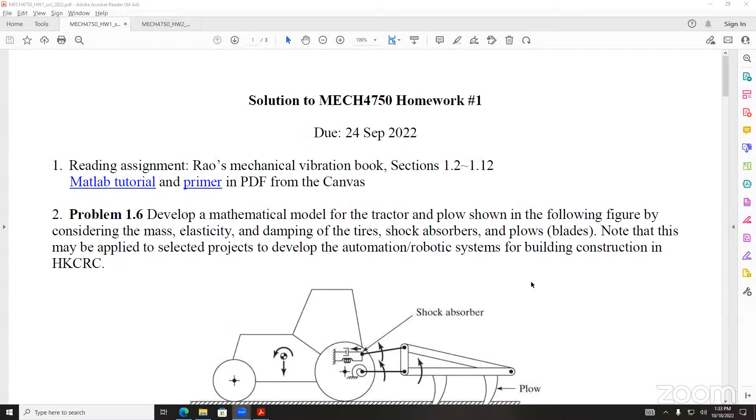I still want to remind you that we really want you to spend time to study and understand this concept of vibration engineering, so that we can tell, either the TA or me, if you spent time to do the homework by yourself.

If you really try to copy your classmates or the TA or something, I will look at your homework again and do some proper deduction of your score. I need to give you all a warning.

If you don't do the homework by yourself, I will try to double check your homework again. If there's clear evidence that you copied your classmates' homework, I will give you a 0 mark in the grading. The TA has already seen it, but it's clear.

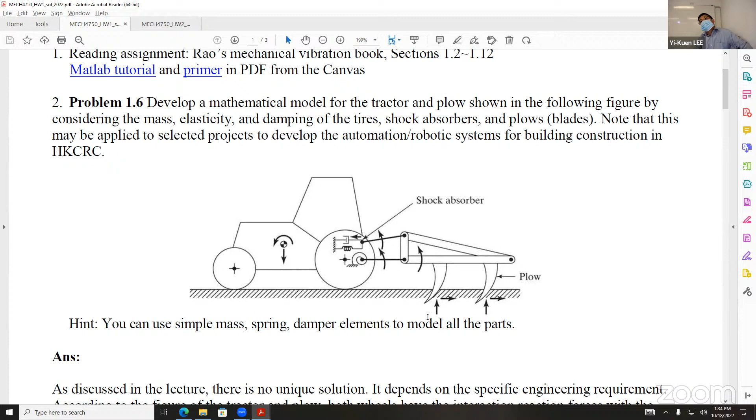Some of you, if you don't follow our UST policy, I will try to make additional deductions. So that's something I need to let you know. When you submit it, I do want you to spend time doing the homework by yourself. I have to let you all know, okay?

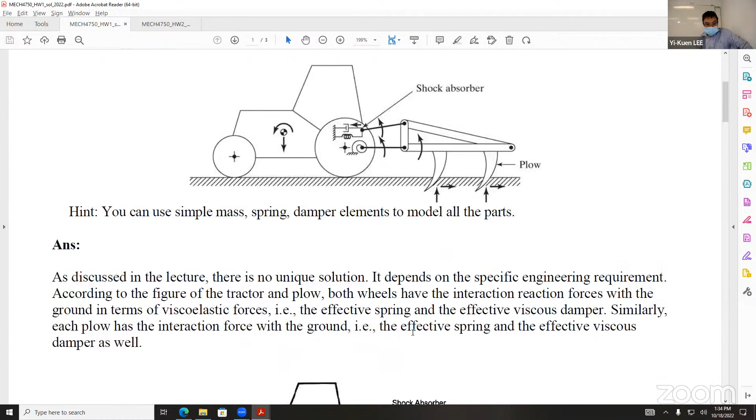For the first one, it's simple, but I also remind you that if you just simply show this result without a simple explanation of why you get this, you need to be careful. That's why you try to propose this kind of model for this chapter. If you simply show this figure without any explanation, I will follow up.

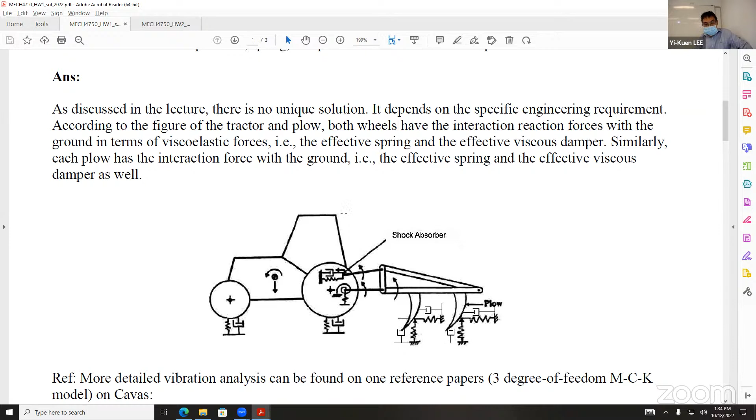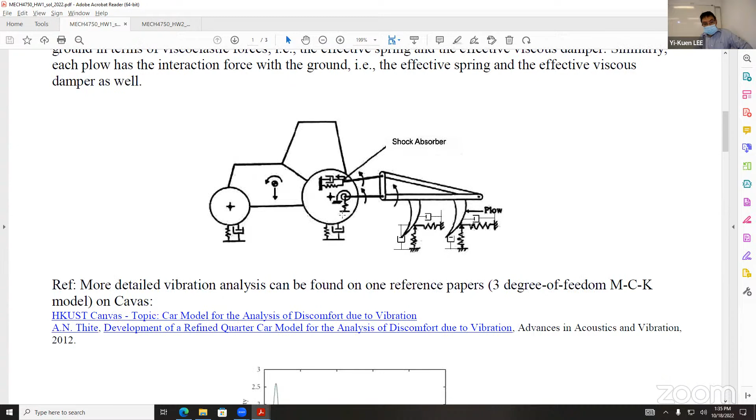The TA will give the preliminary grading, but I have provided you additional reference on our Canvas website, so that if you don't really try to explain, I'll just tell you why.

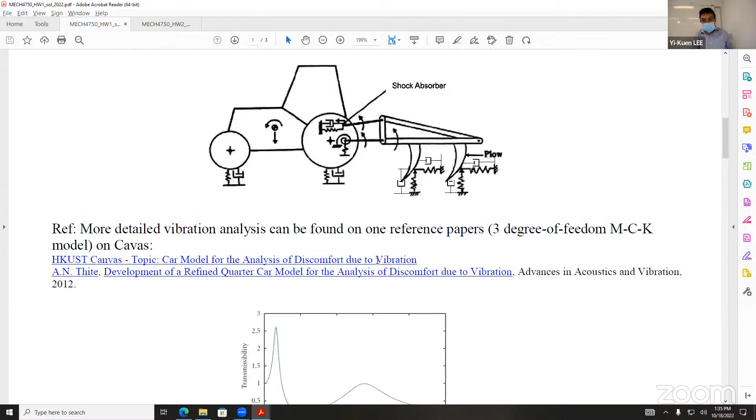For this particular problem, I already mentioned in a previous lecture, and on Canvas, additional information, so try to understand about this kind of real frequency response function, or vibration response, of this car model.

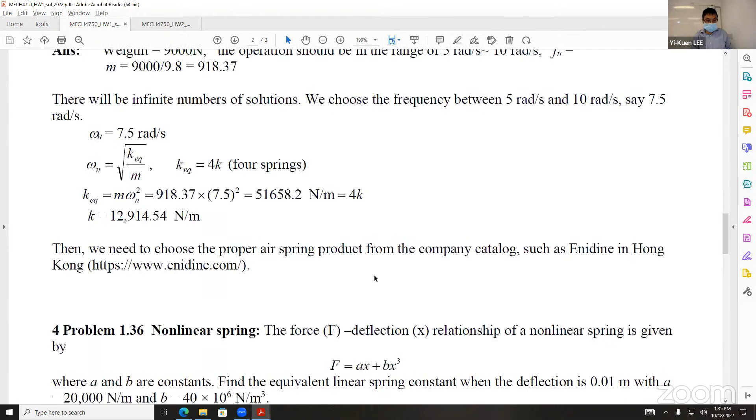This one I think is not challenging, but I also let you know that the problem I ask you to do is related to some real vibration engineering in field study, so it's important for all of you to have some understanding about real vibration engineering.

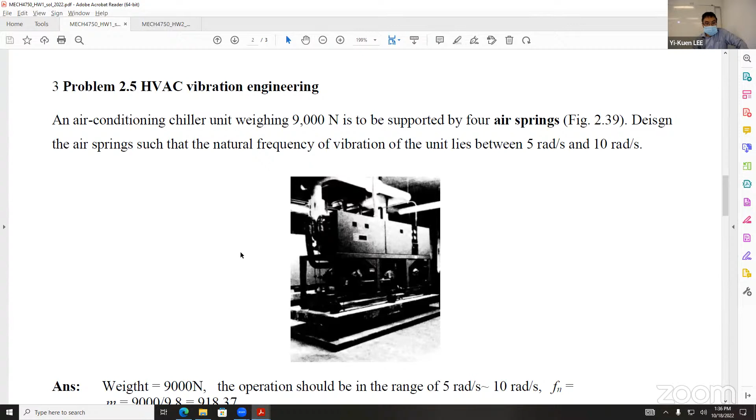That's something I emphasized many times right in the beginning, so I don't want you to simply do the homework without understanding the engineering aspect of this kind of work.

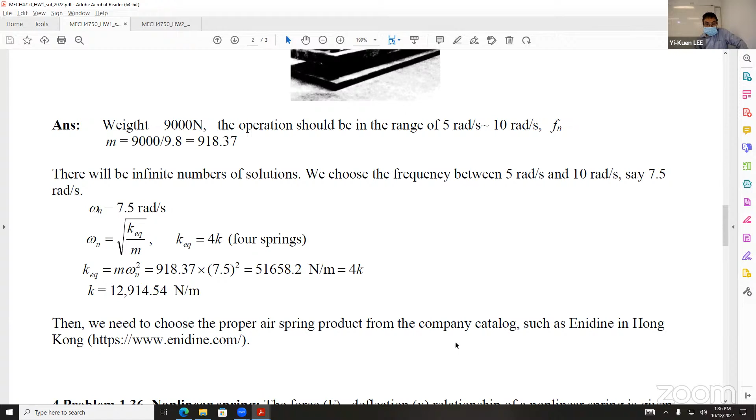That's why I also provide you this, so when you do the homework, if it relates to real vibration engineering, for example, this company has this kind of product for local engineers to use in vibration engineering, so I tell you.

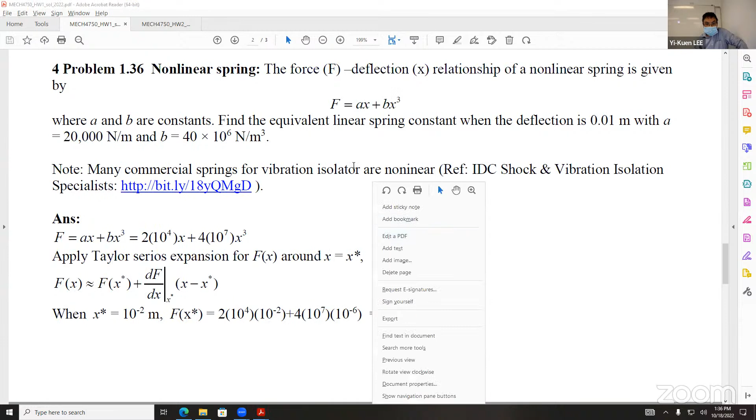Number 4 is another thing I mentioned - this is not just basic homework, but in reality, many passive vibration control systems involve this kind of nonlinear component. You have M, C, K, and most likely sometimes your vibration isolator and vibration damper are somehow nonlinear.

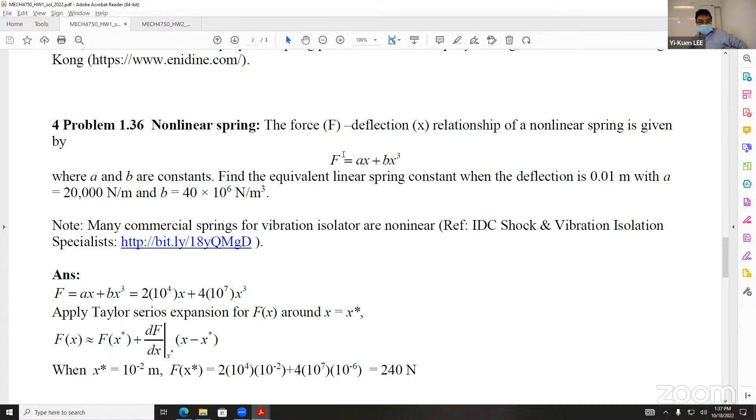Here it's just to show you, and I mentioned several products that are most likely nonlinear, so this gives you some real understanding about how engineers can use simplified, linearized models to work on vibration engineering.

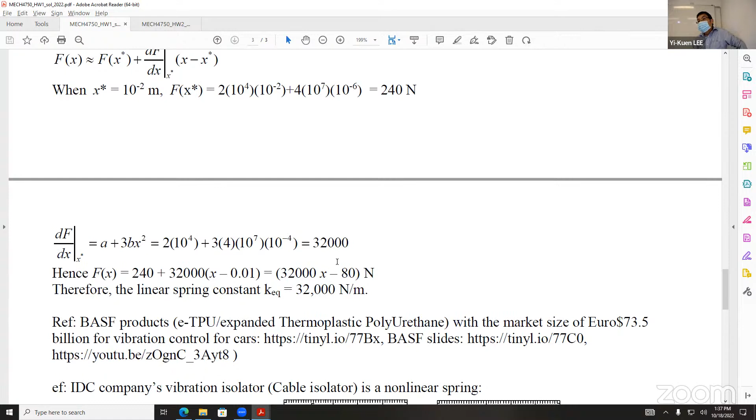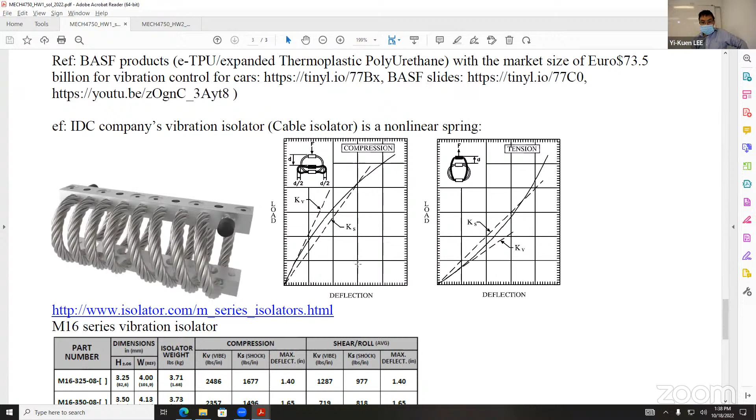Okay, so here's some of this real data. You see, typically it's nonlinear, so that's how you can try to get a reasonable good estimation about this kind of equivalent spring constant, or equivalent MCK model for vibration engineering. These are something important for all of you to understand.

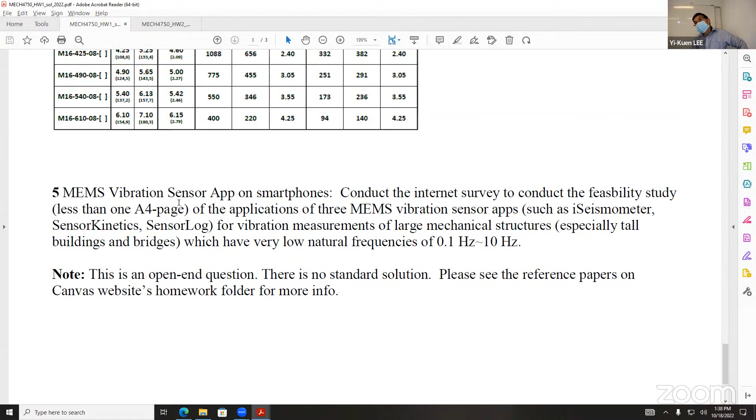And of course this is an open-end question. Again, I noticed some of you just simply copy content from internet without additional discussion, and you already submitted this one. I will look at your solution again and do some additional minor modification about the grading result, so this is something important. I do want you to carefully spend some time to learn some practical knowledge and skill in this area.

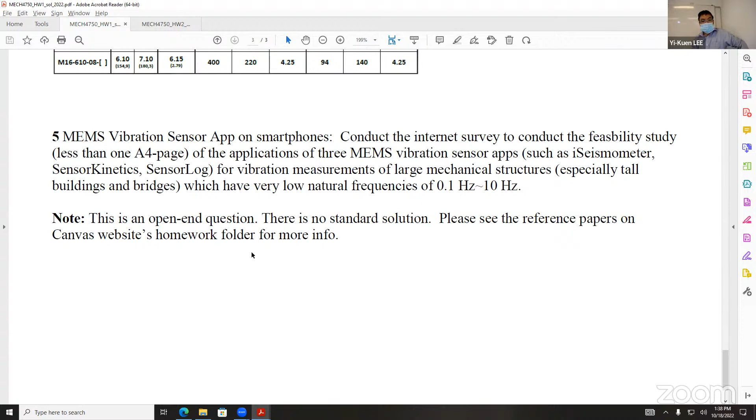Do you have any question?

Again, all this will include most likely the concepts in the lecture note, and homework will probably be included in the midterm exam next week.

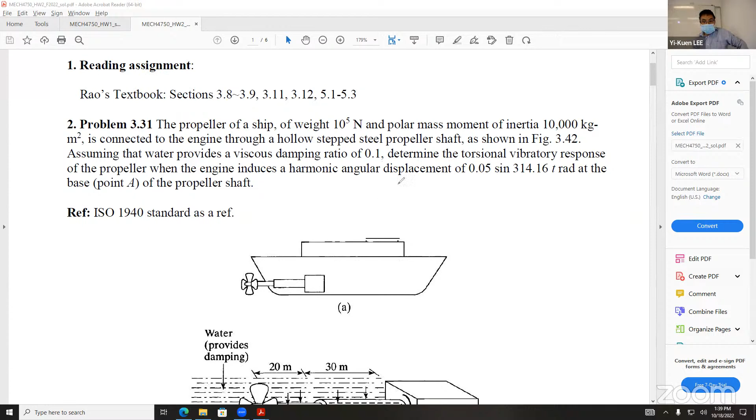And then the second homework, one student last week asked about some question for this kind of mechanical property, right? So I already gave you some basic advice. Many of this kind of practical vibration engineering, most likely, don't have well-defined parameters. You need to look in some handbook, mechanical engineering handbook, or something to decide, so this is important for all of you to understand. In practical engineering, you need to dig out missing information.

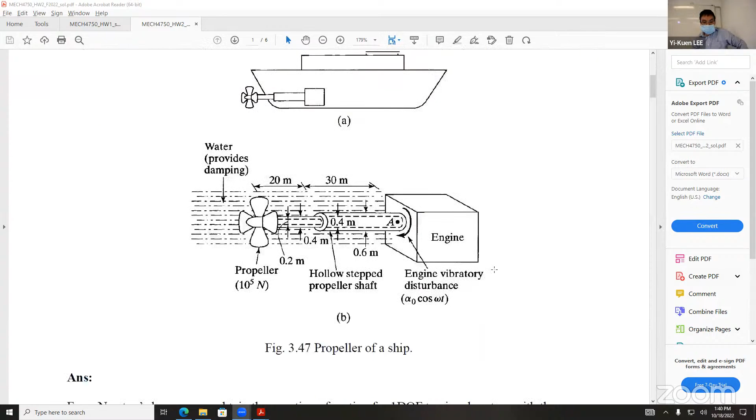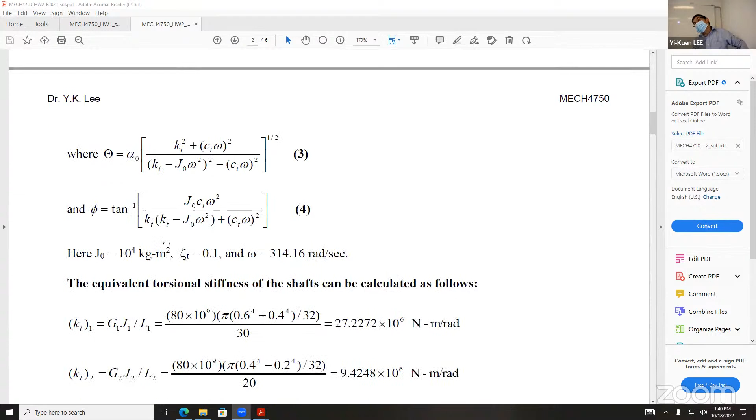For this part, basically, if you use Newton's law, you can derive this equation of motion for one degree of freedom MCK model. But this is a torsional system, and under harmonic excitation, you can try using our solid mechanics to determine the equivalent spring constant.

Again, I already reminded you that you can look at things. At least some students asked questions, so I gave you some guidance. In some practical engineering, you may want to look at some handbook for typical mechanical properties to determine this kind of spring constant. So for our undergraduate solid mechanics, you should have a basic understanding about typical Young's modulus and shear modulus.

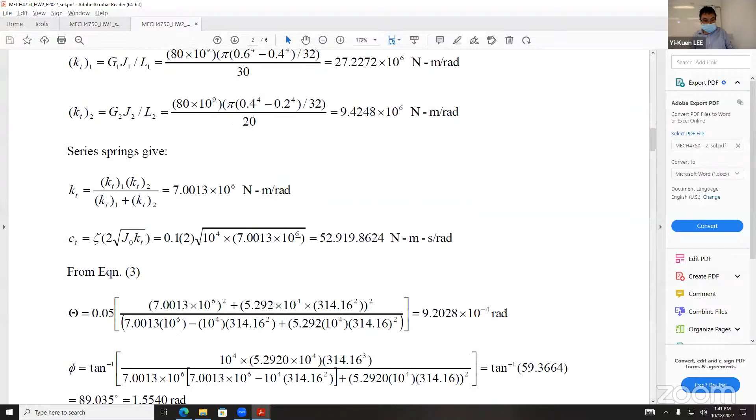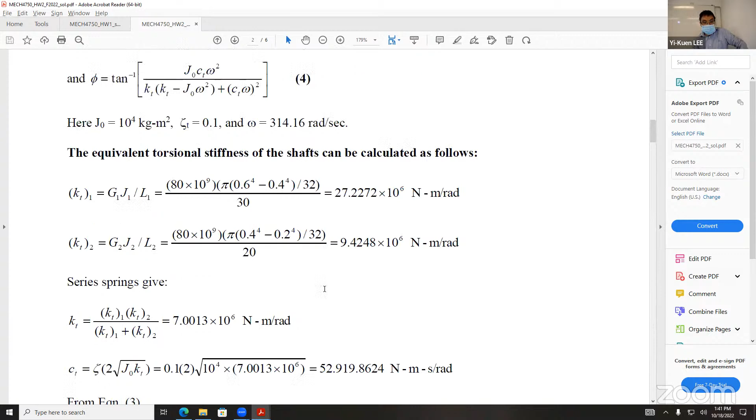And then, of course, this gives you some ideas that you need to think about things. And I also provide you some information, right? Once you do the homework, the next question is how big the vibration is, whether it's good or bad. So for this kind of propeller vibration, they do have industrial standards.

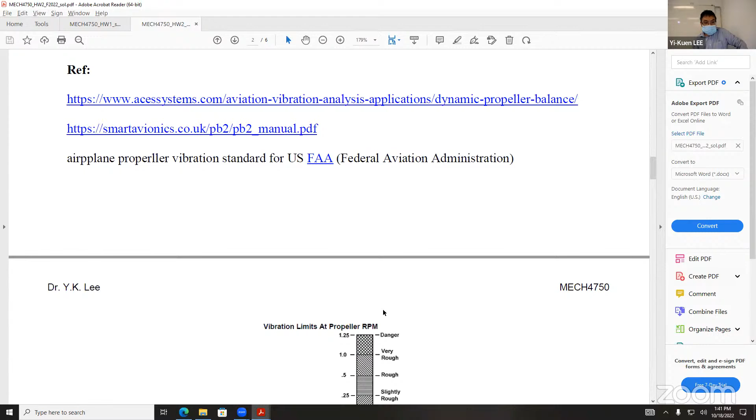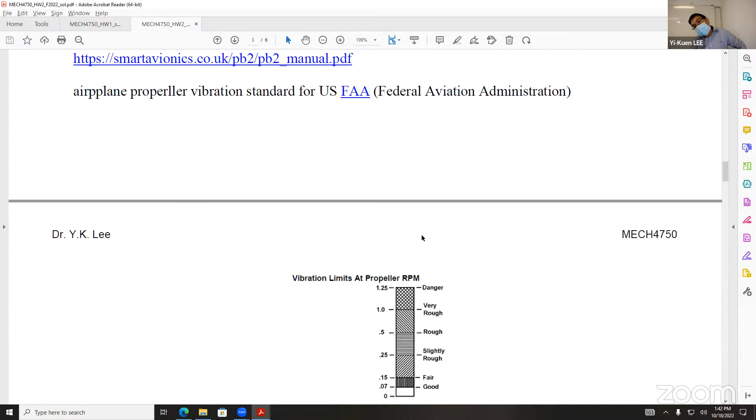Industrial standard, so for example, I show you one propeller vibration standard from US FAA, so this is a well-defined vibration output. As I mentioned, for different industries and different requirements, for marine engineering, for aerospace engineering, different industries have different standards.

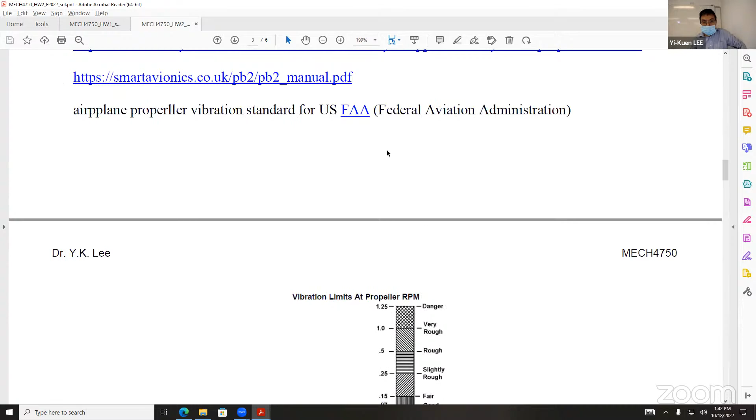Because this is from the US government, the standard they specify is in inches per second, but you can easily convert it into our standard units.

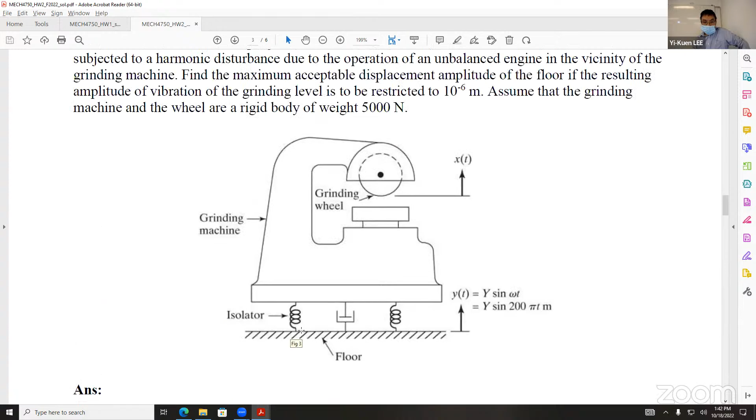And finally, another one is a precision grinding machine. This is also not challenging, but it's important for all of you to understand this kind of thing. You can look at the frequency response function we discussed in our lecture, and then determine it.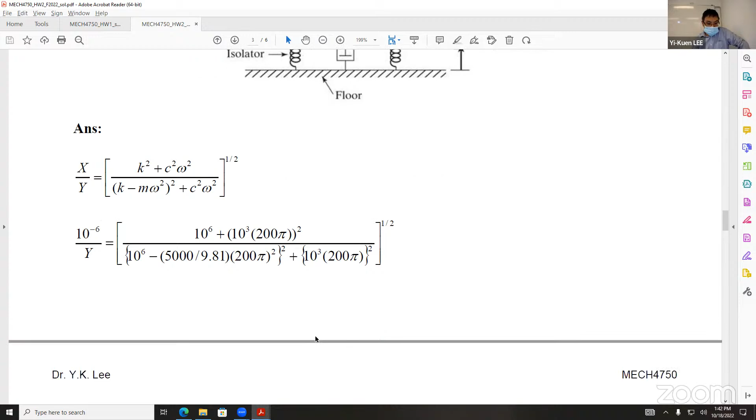Of course, you can also use this kind of MATLAB program. Then you try to enter those given conditions, and try to determine this kind of input-output response, and then calculate the output in terms of vibration amplitude.

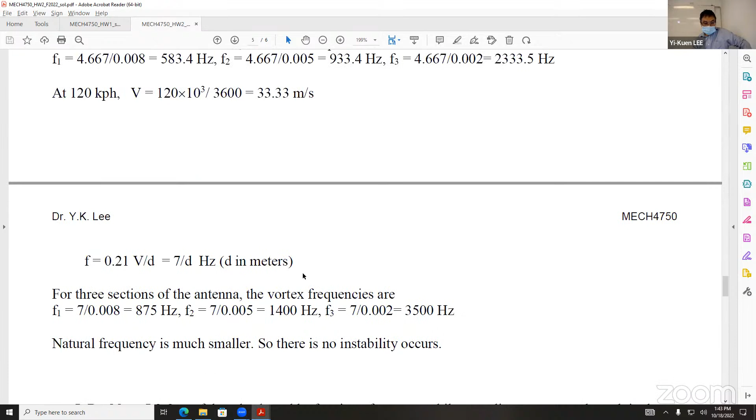And this one, number 4, is another one we also mentioned in our previous lecture, so it's not challenging, but at least this is a flow-induced vibration problem.

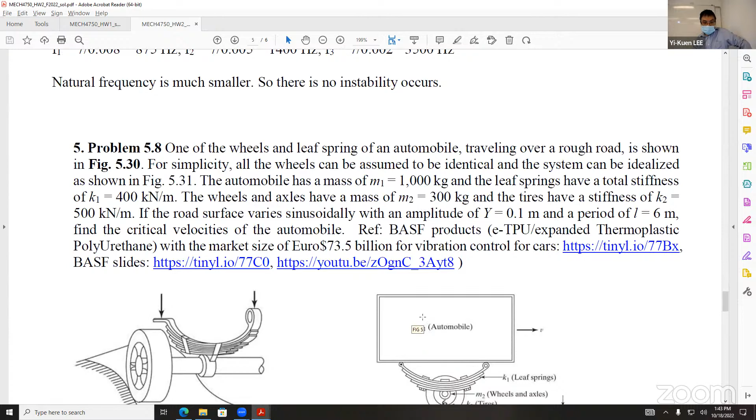And finally, this problem is a little more difficult, but I tell you that if you look carefully, you can still do this thing. If you use a simplified model, which we mentioned, and then based on Newton's law, you can derive the equation of motion.

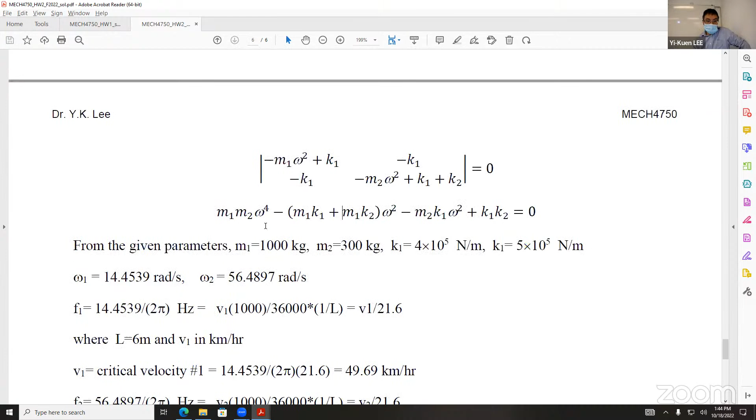Under harmonic vibration, you can try to analyze this thing, and then eventually calculate this kind of natural frequency. Actually this has an exact solution, it's a quadratic equation for omega squared, and then you can determine this critical velocity. Okay, anyway, I just wanted to give you this.

Do you have any question? I just want to make sure you understand, since this is additional information I'm providing you.

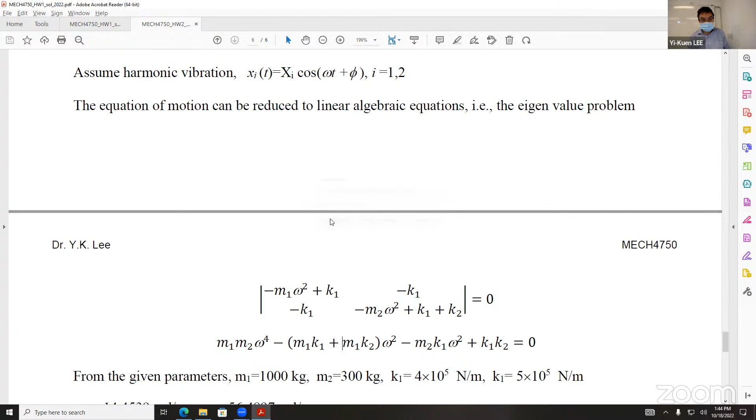Of course, I also last time discussed about mechanical vibration of the whole body, so we described how the human body can be constructed in terms of a multiple MCK model.

So the question is, many of these products, VR, AR, MR, metaverse, they're going to have a lot more of this kind of sensor. And how do you use all these sensors to create this avatar human body dynamic model? This is something quite important, big business.

How big is the business? What do you think? Are you able to make this kind of sophisticated human body dynamic model as an avatar?

How many degrees? We also ask you this question. What do you think about this avatar? You could use some kind of sensor, including motion sensors checking human body dynamics, or simple image sensors, or LiDAR, like in iPhone 12 or beyond, using solid state laser VCSEL technology. With this kind of sensor, you can capture human body dynamics, capture human facial recognition, and then recreate the model.

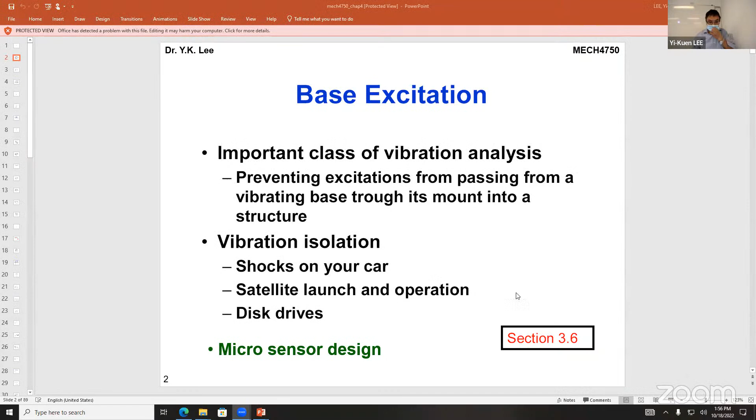Any questions about what we described in the homework? Anyway, we already tried to describe this kind of MCK model for vibration engineering.

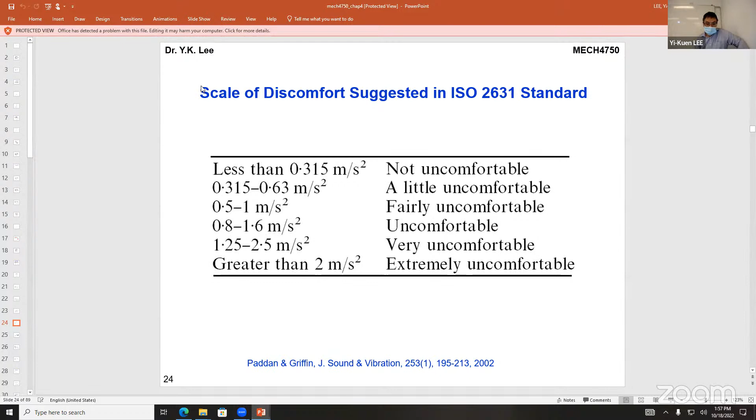I think we don't need to dwell on this part, of course emphasizing the engineering application. For different engineering applications, different standards, like the ISO standard we mentioned for human body dynamics, different motion variables observed affect human comfort.

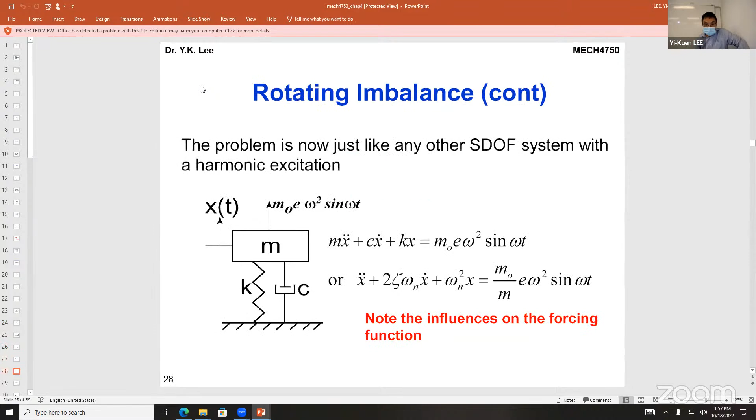And rotating machinery is also important - we gave you homework on that. We also mentioned simplifying the vibration problem, and last time we mentioned another important issue about self-excitation, which is definitely a quite important branch of vibration engineering.

So the key problem here again is what? Many times for some mechanical system, what's the problem? Your MCK mass spring system model may depend on external conditions, flow conditions, as we mentioned in the first lecture.

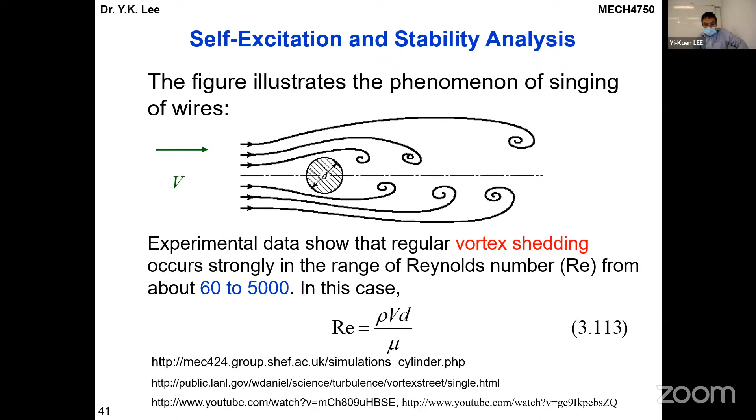In self-excitation, some parameter in MCK, most likely the damping C, is a function of input parameter, input velocity or something. If input velocity is too big, it can cause flow-induced vibrations, as we just mentioned.

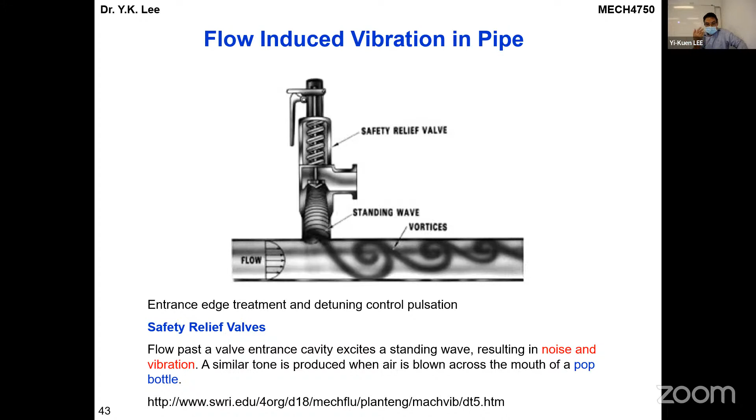Of course, this involves many engineering problems. In the homework, we'll tell you about this kind of antenna in the car. And also flow-induced vibration in pipes for HVAC or building engineering - we also told you about this detuning. Basically this is something quite important.

Once you have certain flow-induced vibration, can you create a simplified model? One to feed the MCK model, or this particular one related to vibration of a continuous medium, the cantilever beam, which has infinite degrees of freedom.

Based on what you learned in solid mechanics, you have W(x,t), the deflection curve W, and based on that we'll describe this.

The natural frequency of the first fundamental mode can be related to the square root of EI, where EI is the bending stiffness you learned in solid mechanics, and beta-1-L is a constant.

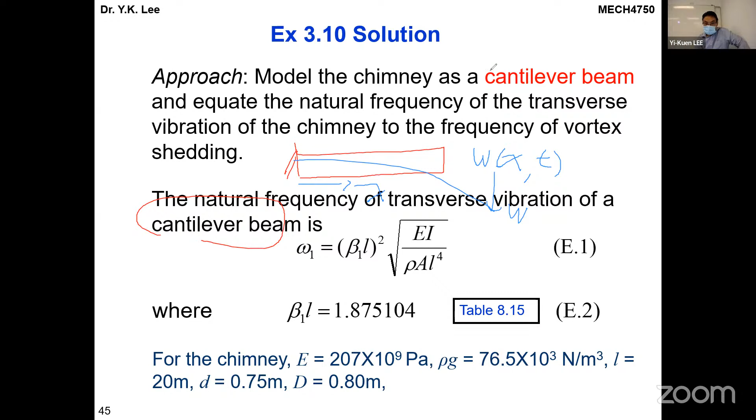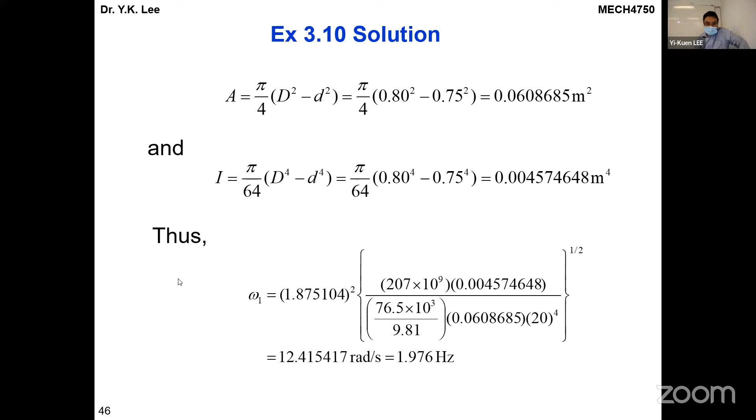So it's very easy now for you to analyze this kind of problem, because we know all the mechanical properties and geometry of this particular mechanical structure, and we can determine the natural frequency.

Next is based on what we mentioned, the Strouhal number - this is a constant for a certain object. If you have a cylinder structure, then the Strouhal number is constant.

So in this case we can easily determine the critical velocity to induce this kind of flow-induced vibration based on our natural frequency and the geometry, diameter of the cylinder. This is something important for all of you to understand.

It's not too difficult, but the key thing is the Strouhal number somehow depends on geometry. So 0.2 is only for the cylinder. Why? Because it depends on diameter D. But if you have a different object, not only a cylinder...

If you have a building, what happens? If the building is like this, what do you think the Strouhal number would be? A tall building - why is this related to the cylinder?

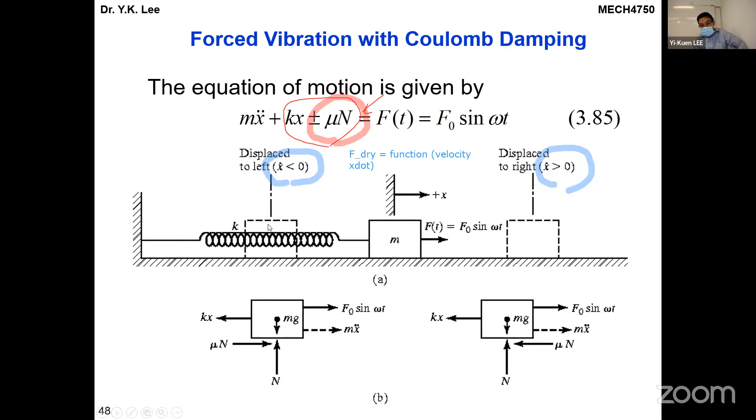We make an assumption, right? If in some condition, the velocity of this mass is positive, we can analyze this kind of response. But if we need to do some more complicated analysis, right?

Another approach is we may want to look at it from an energy point of view, if we have this kind of harmonic vibration for this mass spring system with Coulomb damping, and look at going through harmonic vibration. This force, and then we look at response X, to see what happens with two things.

In one cycle of this harmonic vibration, we calculate total energy dissipation. And in this case, we may want to get the equivalent damping coefficient for this kind of dry friction, so that in this case it will be easier to do analysis.

So this is something mentioned. Once you have very complicated nonlinear behavior, sometimes engineers want to make our life easier, right? Get the equivalent damping, viscous damping.

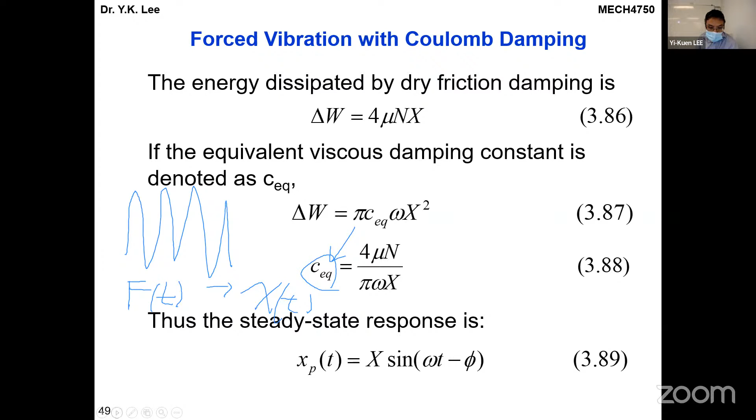And of course, if we do this, then we can try to use the framework we learned in the previous part, right? For our MCK, where C is viscous damping. So this gives you a way to simplify this nonlinear mechanical system with this kind of dry friction.

So anyway, this is quite important. And if you look at this carefully, we can try to carefully understand this kind of thing, right? You see, for this vibration amplitude, and W is energy dissipation input, we can calculate this kind of energy dissipation in one cycle for mu N X.

Okay, so here, we should give you an example of how we solve this problem, right, for this MCK system, but the damping is Coulomb damping and dry friction.

So if this mass is 10 kilogram, spring constant is 4,000 Newton per meter, and the friction coefficient is 0.12, and the input harmonic force has frequency 2 Hertz, and the mass vibrates with this, can we try to find the amplitude of the harmonic force applied to the mass?

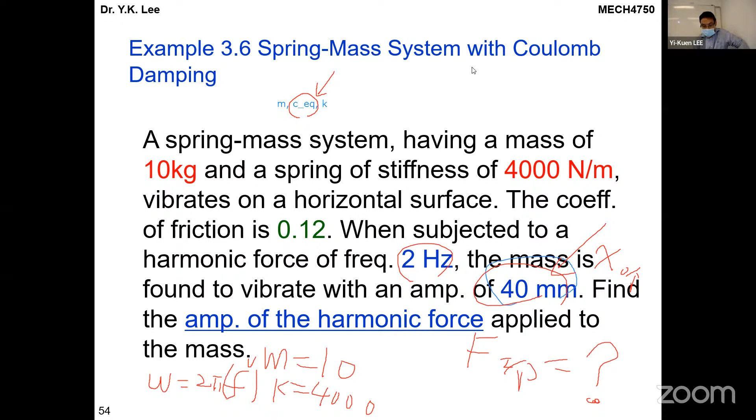Then it's much easier. For example, here our M is 10 kg, K is 4,000, and our driving frequency, right, this one is 2 pi f, where f here is 2 Hertz. And then so the output amplitude, how can we do that? Basically we can try to think about using what we discussed in the previous slide.

See, this is a solution. Why? We can use this kind of simplified model, or this one. We have all the M mass spring constant, and then also here. So that we can try to do this kind of analysis.

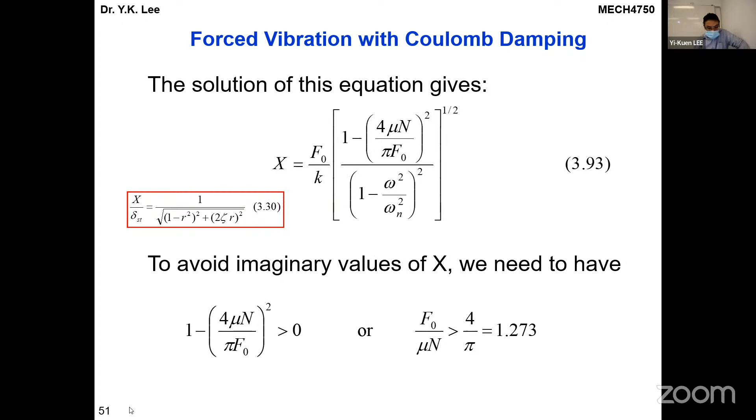Based on here, we can first calculate our natural frequency and frequency ratio. In this case, we know the output, but we don't know the input. So we can use this to do this kind of analysis eventually, to determine the unknown force, the amplitude of the input force.

Okay, so this is one example, but of course, I'll ask you, do you have any other way to analyze, solve this problem? Any other way? This is important, right? I will tell you a different way to solve the problem, so this is only one solution. Can you think about a different solution?

The one we show here is the analytic solution. The difference is doing approximation. Of course, that is also possible, but it would be a little more complicated.

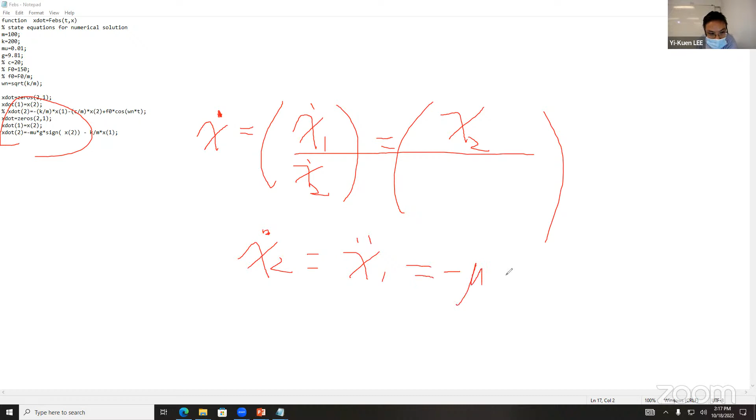Do you understand? So x2 dot is what? X2 dot means x1 double dot. And then equals what? Minus mu g sign, this is a built-in function in MATLAB, and x2, and minus k over m x1. This is it. Basically, this is the one we describe in our lecture note here.

If you look at carefully, you see about that. If you look at our... actually we just described this equation of motion in terms of MATLAB. Do you understand? So I hope you understand how we can now use MATLAB to describe this in this form. Do you have any question? Any question for this? Do you understand? Any question?

Of course, the key issue now is our F0 force amplitude is unknown. So in this case, you may need to think about, can we do a parametric study? We have certain equation of motion described in MATLAB as an M function, right? We need to try a series of force amplitudes, different F. Maybe start from 0.1, and then gradually adjust, and see what our output is - this vibration amplitude for different input force - and eventually try to find one particular force that can meet our requirement in this homework. So this is, I would say, you can use MATLAB to do calculation, but sometimes you need to do a parametric simulation to get this result.

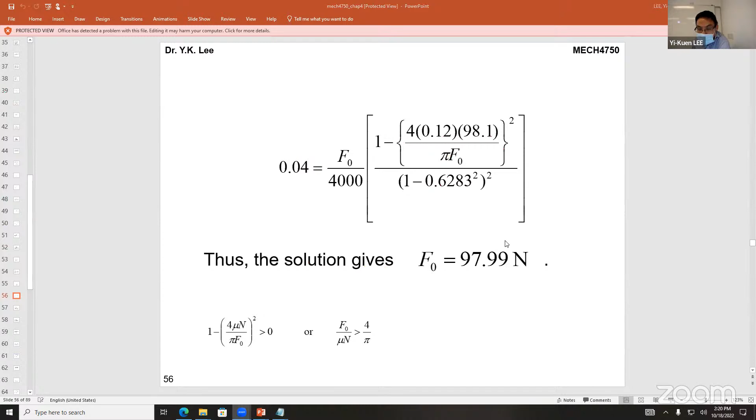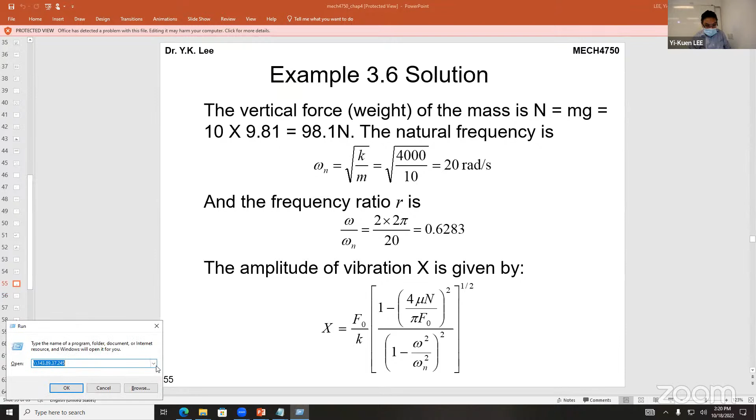Okay, do you have any question about how we can use MATLAB to do this kind of simulation? Maybe I think it would be better if I try to show you. Do you have any question for this? This again, this is a second solution.

Let me show you the MATLAB. I think it's still important for me to show you this, because MATLAB can help you do even more sophisticated problems. Let me try to open this particular file. Here we have this.

So this, I try to open this M function in MATLAB editor, right? And then, as I showed you, we can really try to do this kind of calculation. Should I create a series of this kind of MATLAB code? Let me see... Chapter 4, okay. So basically we will try to run this chapter 4 file. If you key in this one, let me try to show you this example.

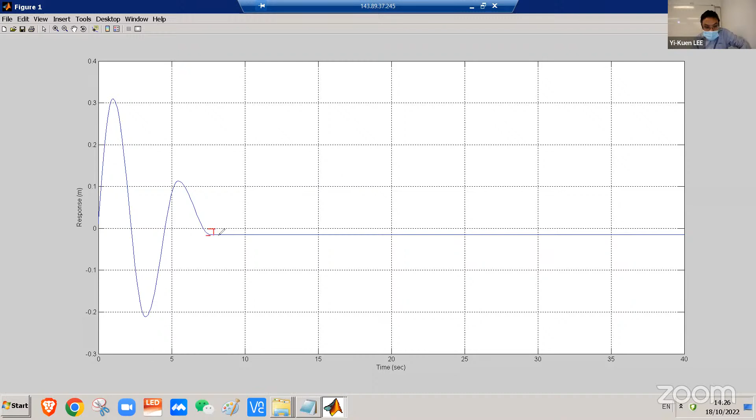Did you see? Compared with viscous damping, did you see the unique difference? After certain initial conditions, when we reach some critical time, what happened? You see, eventually there is no oscillation - you stay still. So this is very different. If you have MCK with viscous damping, you continue to have vibration all the time - blah, blah, blah. So these are very different.

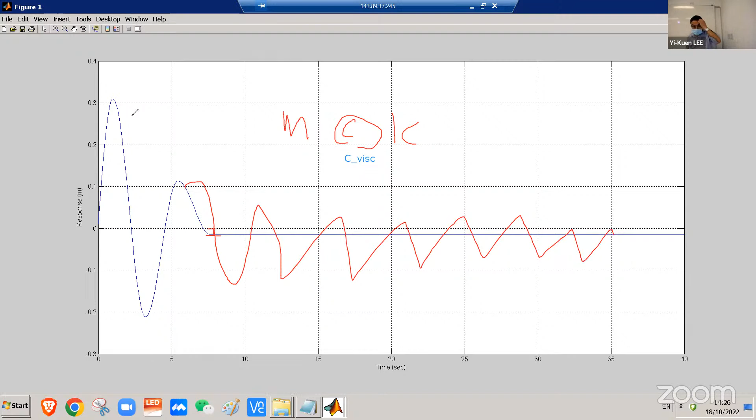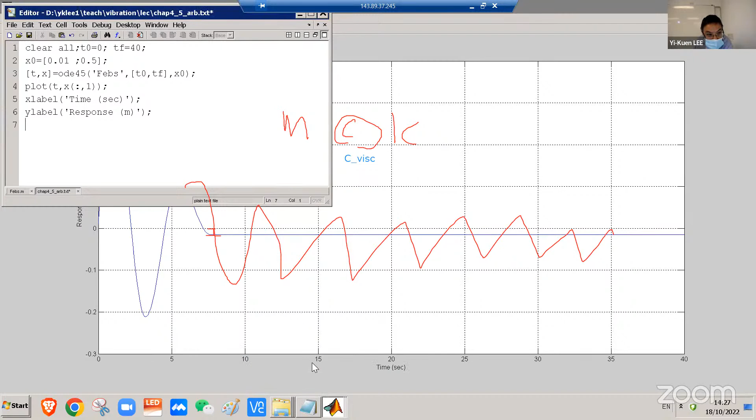Of course, the question is how you use MATLAB to solve the same problem we solved analytically. How? Basically, you need a series of simulations. So in this particular example, what's our F? We already find the force amplitude in this function. Do you understand? So in this case, it may not be...

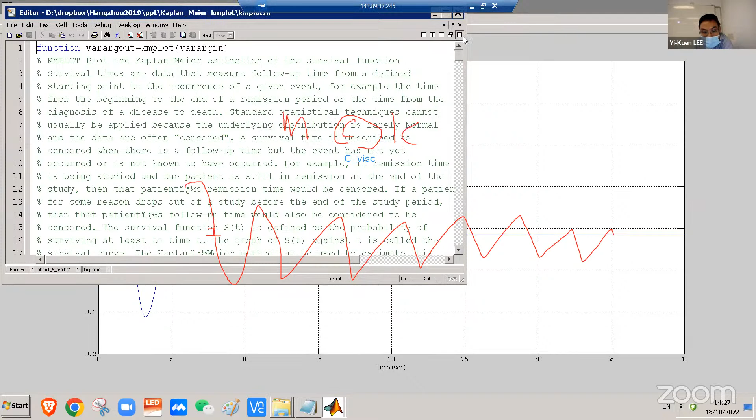Uh-oh. Oh, sorry. This is not... this is a program I created for a Kaplan-Meier plot. I have a microfluidic research project about cancer research - this is another project, sorry, I should not show you this. I don't know why I opened this. I've used MATLAB for 30 years. I just... I don't know, I should not have opened this.

Okay, here, Febs - so here we will assume our force amplitude is given. Do you understand? It's given, but in reality if you want to do it, we may need to think about how we change that force, right? So this is something that takes some time for you to do adjustment, with different force amplitudes, and figure out how we can do this kind of simulation - a series of simulations so that we can really find the right solution. I tell you, this is a very different approach to solving the problem.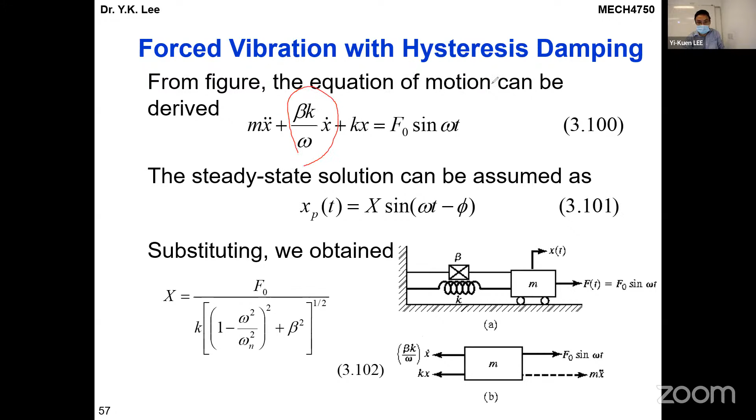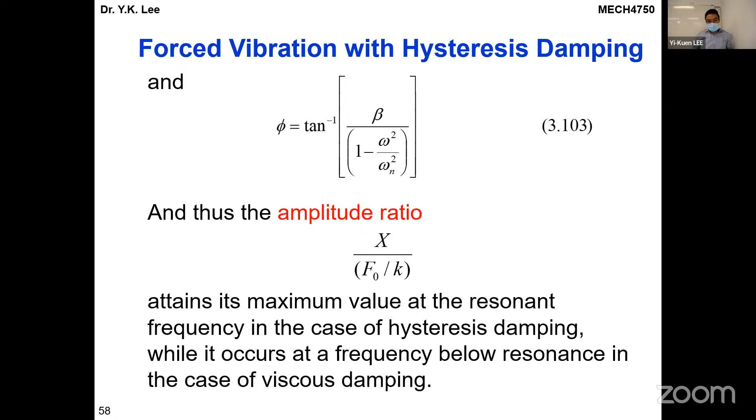So how can we see this? Again, we try to use a simplified approach to basically make an equivalent M,C,K viscous damping to solve this kind of hysteresis damping, because it is also more complicated. So we prefer to create this kind of simplified way for material damping, hysteretic damping. In this case, we describe this beta, which is a parameter related to this kind of hysteretic damping.

Of course, you can also use a complex number approach to describe this kind of thing. One term here is related to the traditional spring constant, and this additional term relates to this kind of damping term. So this is another way we can calculate and show a complex number approach for this kind of M, C, K analysis, where K is related to material damping.

And of course, if you try to see, this shows you for different beta related to material damping, the response will be different.

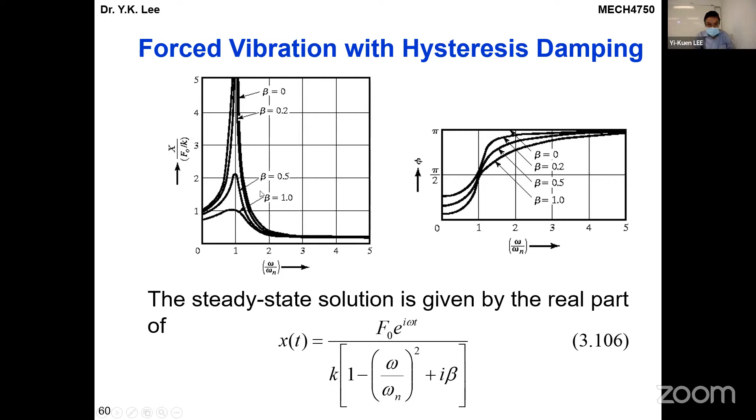Finally, here I show you another important thing we mentioned several times. This is the ISO International Standard 2631 for whole body vibration. The X axis is frequency, Y is root mean square acceleration. Root mean square means acceleration over time.

You basically look here and here, and get some average, which is a root mean square result. This one is a family of boundaries, which is the maximum allowable acceleration for a certain period of time. If the vibration is too big, humans can only tolerate a very short period of time. If the vibration is small, humans can tolerate a longer period of time. But this gives you some idea, in general.

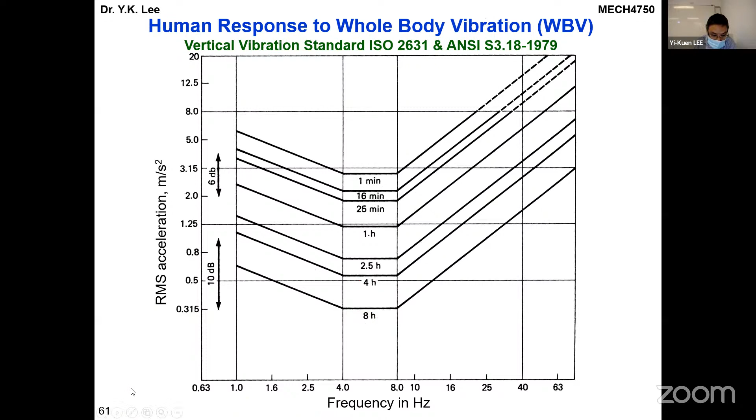This can be used for some practical engineering design, for example in the automotive industry.

So basically, here we show you there are actually 3 types of exposure limits for this. First is the reduced comfort boundary. Second is the fatigue decreased proficiency boundary. Different standards have different applications: number 1 for airplane, boat, and tram; number 2 for flying, driving, and heavy vehicle; and number 3 is the exposure limit.

This is something important for some of you if you design an automation system for the human body, or something a person sits on like a car. This is an important thing.

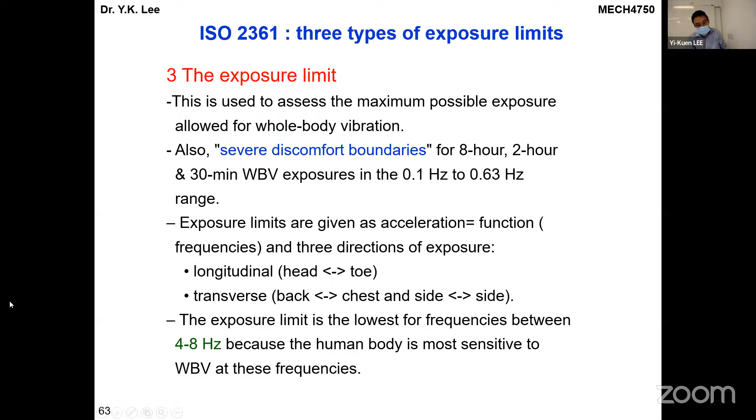For fatigue decreased proficiency, basically the exposure limit is multiplied, and this kind of acceleration is multiplied by 2, or 6 dB. This will give you something, as shown in the curve, and then you adjust this kind of thing to get it.

And the reduced comfort boundary is divided by 10 dB. So it's only one standard: root mean square acceleration as a function of frequency, and by changing the y-axis by a certain factor, you can use it for the three kinds of applications in vibration engineering.

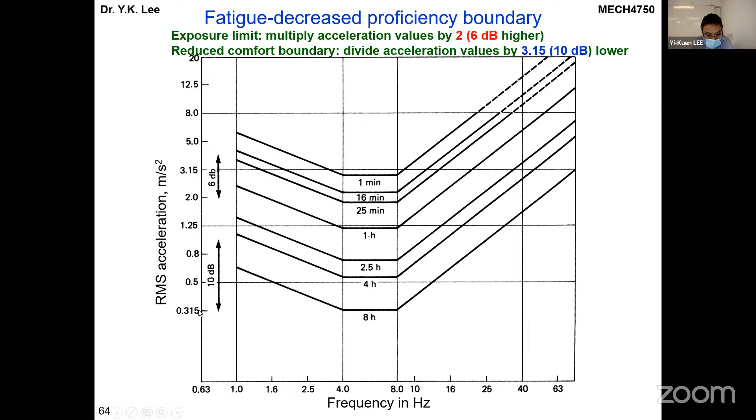And finally here, I already mentioned this one, so the human body can be regarded as what? Multiple MCK model, right? So you have for each component in your human body a certain kind of MCK, and a certain kind of frequency, right? So this is something I told you.

If you want to create this kind of complete, good human body dynamic avatar in computer, you may need to at least think about how many degrees of freedom will be necessary to build this kind of human body dynamic or avatar. Whereas now we use this kind of different language, avatar.

And what do you think? The question is, can you create this kind of avatar? What do you think? It's important to ask yourself, can you make this kind of human body model, or we call avatar in computer?

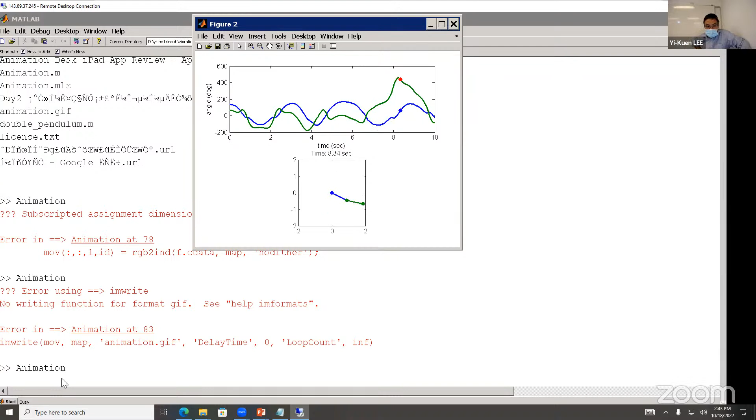Do you have any question for this example? Again, I told you MATLAB is very powerful. It can be useful to solve many interesting problems.

Of course, the question is, can you make this kind of avatar human body do the simulation? What is it?

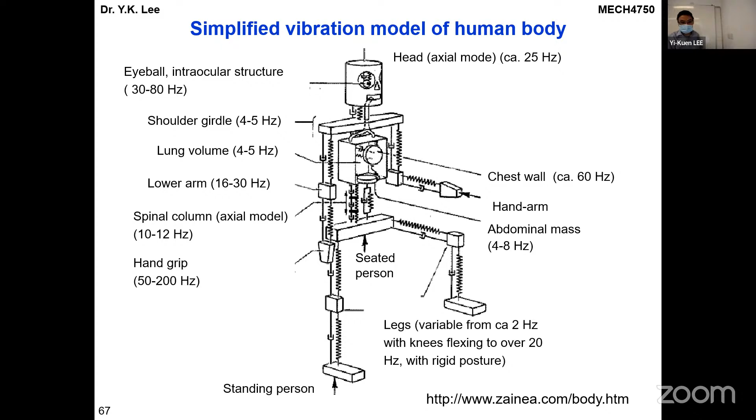And of course, another practical important thing is, for example, you are an engineer designing a car, automotive industry, and then the question is how you evaluate, right? If a driver is in a car, you look at the vibration response when you sit in different kinds of seats, different designs, different MCK, and different responses.

So suspension seat, standard driver seat, contour chair - different designs give you different vibration responses. So then you need to evaluate based on the industrial standard, ISO standard, to make some important decisions, to see what kind of design will be useful.

This is transmissibility. Remember, we calculate input-output response transmissibility, XY, as a function of this kind of damping ratio and R. So this is transmissibility.

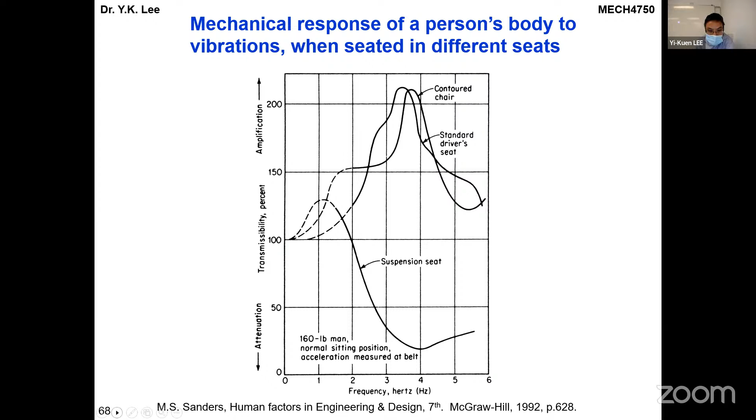Again, if a human has a lot of this kind of vibration, what happens? Whole body vibration can cause some disease. For taxi drivers, if you stay in the car for a long time, it can cause problems: lower back pain, blurred vision, insomnia, headache.

A series of health problems are induced, so it's important now for many engineers designing machines, car automation systems, to think about how this kind of vibration of the machine, car, or robotic system affects human body health. This also affects people movers, elevators, escalators, and lifts.

So this is something important. And there's another. As mentioned, for vibration of a car, a car has very complicated rigid body dynamics.

If you look at the wheel, if the wheel is not ideal, under certain frequency, you can get a certain kind of wheel shimmy instability, especially if you don't do proper balancing. This can be a big problem for cars, also related to vibration.

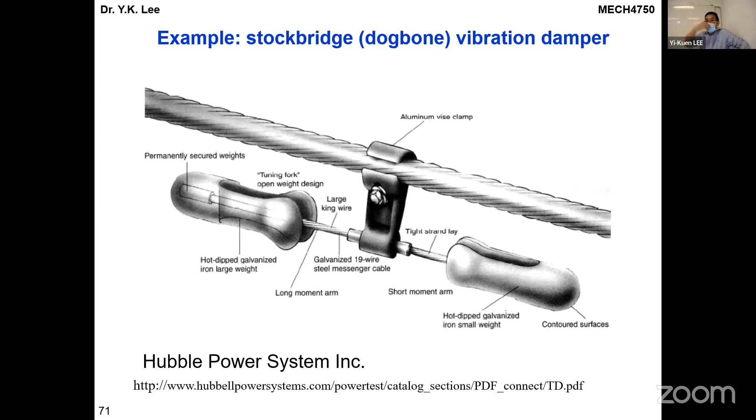Finally, I'll show you another vibration engineering example for power transmission lines, seeing why the Stockbridge vibration damper is used, as I mentioned, for galloping of this kind of wide power transmission cable. I think I'll show you this one.

Basically, this is another aspect, as I've shown you, that many times we have a complicated vibration problem.

Greetings, this is footage from Wednesday, November 12th at approximately 4 p.m. That is the WXW tower, and we're going to show an example of what galloping guy wires look like. This is the WXW tower, which looks very solid despite a pretty steady breeze out of the northwest, which is prime conditions. We also have light icing, and you're going to see the photographer pan over right now and take a shot of the WHLA tower, which you can see in the distance, and you can kind of see their guy wires galloping pretty severely. Our snubbers just got installed the day before. There's a shot of them attaching to the northwest guy. The wires themselves are tied down almost near the parking lot. A little bit closer look. Like I said, just installed, and you see a little bit of movement, but the snubbers appear to be doing their jobs. There's a shot of the guy anchor at WHLA, and there's a little bit wider shot. As you can see, pretty serious galloping going on on their tower, which is approximately the same height, just right next door to us. So these are conditions that were favorable to galloping on our tower back in February, and it just happens that we just got the snubbers in just in time. And here's a shot. The photographer got pretty brave and shot right up from the northeast guy anchor at WHLA. You're seeing quite a bit of whip up the line, pretty seriously demonstrated.

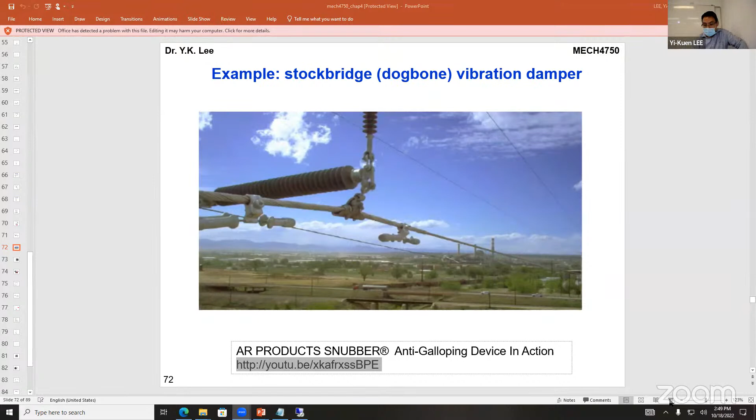Now we have a new kind of application in the virtual world, which is a new branch of application. I do hope that you can really think about something unique, to try to make some interesting application about what we learned in our course, and some additional reference on our campus website.